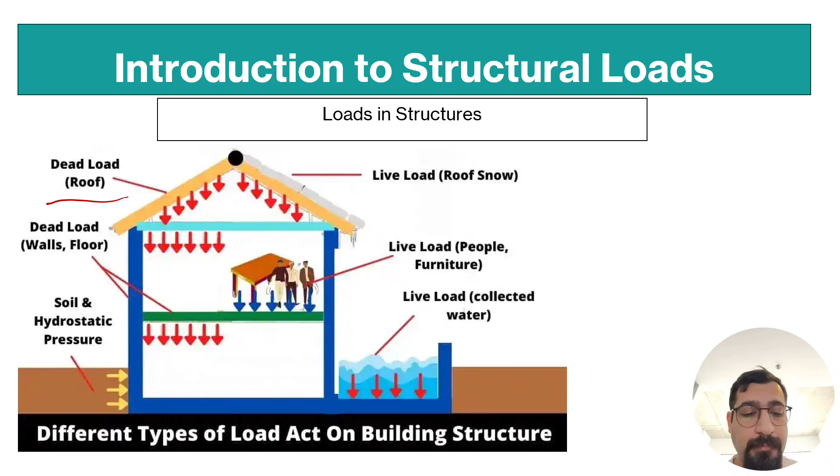Now let's jump into the topics. There are four different categories of loads on structures. We consider these types of loads as gravity loads, like dead load, live load, and snow load, which is different in different environments, and lateral loads. These three are vertical or gravity loads, and these are lateral loads, which include earthquake, wind, or even soil pressure load.

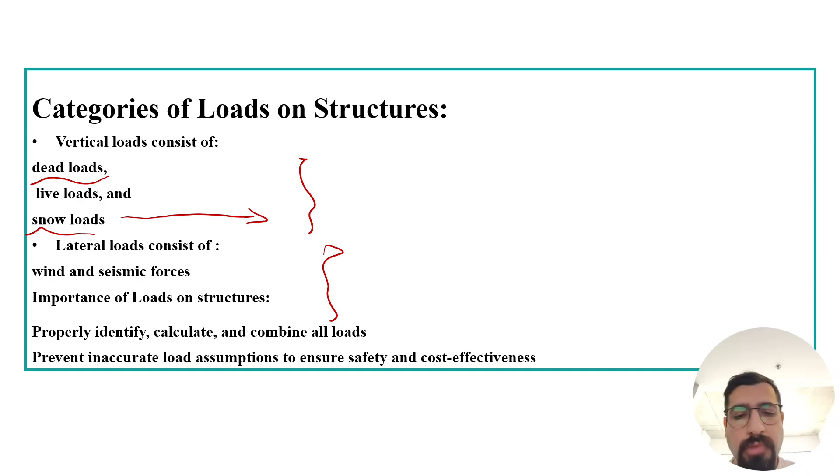Each of these load categories has different types of suggestions in the codes which we should follow, and my main idea is to get to know it based on the NBC, National Building Code of Canada. There is one other question: why do we want to calculate the loads? Basically, we design members based on the loads.

I'm not gonna go to answer these simple questions. I just prepared the slides. You can read. The slide is pretty simple. I want to talk more.

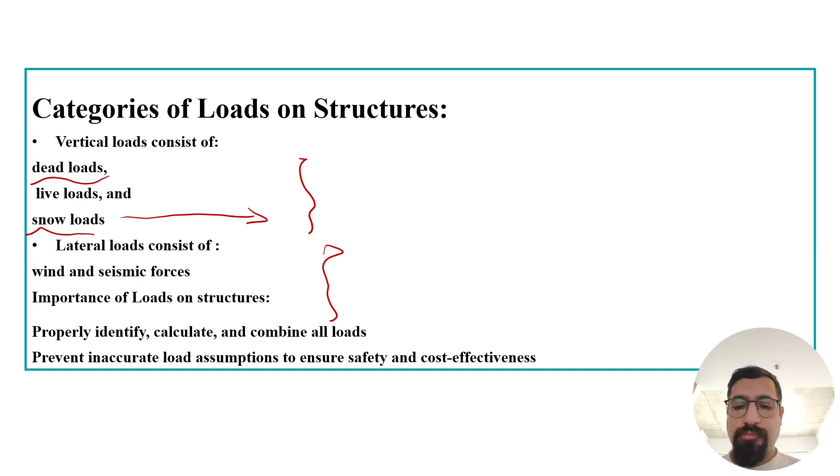So why do we calculate these loads? We want to design our members based on the most exact possible load that is acting on our members. If we underestimate the load, the structure may become unsafe, and if we overestimate the load, the structure becomes unnecessarily expensive and is not an optimized design. As engineers, we should always consider the economical part of the problem in our design.

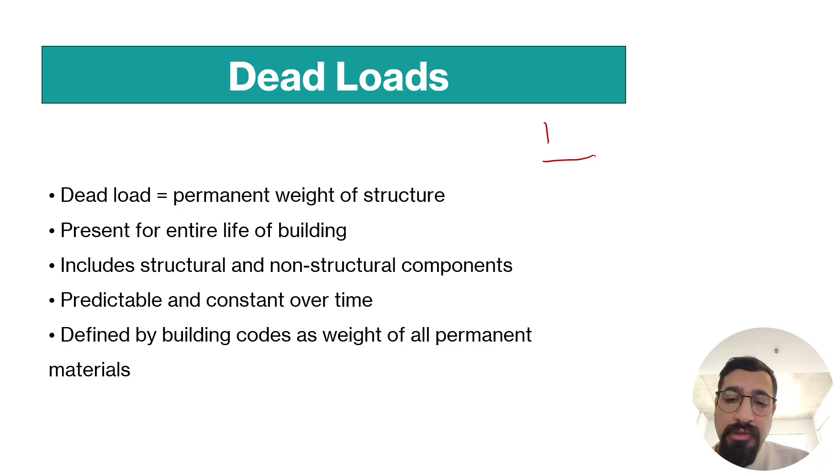Here's some explanation about dead loads. It's the permanent weight of the structure. Dead load also has two categories: dead load and super dead load. Normally we call dead load the self weight of the members or elements, and the super dead load is all the other dead loads, like furniture, tile, ceiling, or even walls, partitions, or any other type of dead load that acts on the structure.

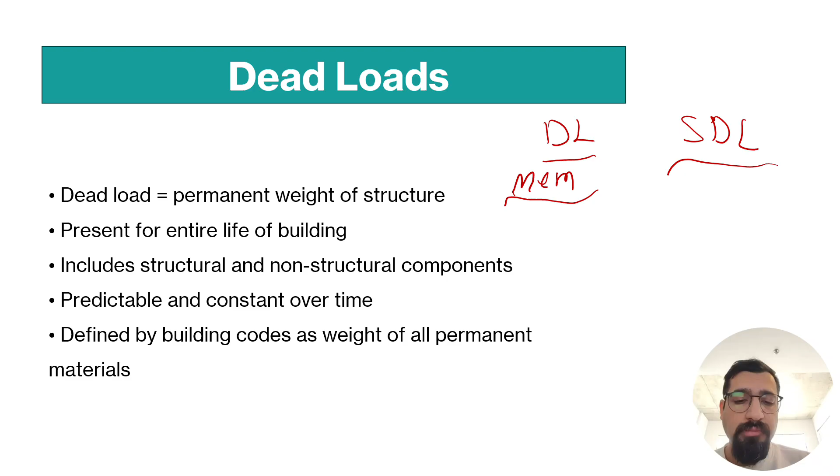The most important parameter about the dead load is that it's predictable and always constant over time. For example, when we consider the live load, we design based on a probability problem. We consider the chance of that amount of load existing based on the definition of the area. But the dead load always exists, and it is normally defined by the weight of the materials and the building code.

The amount of concrete volume for the topping is only 0.092, and the concrete weight, we know, is 24.

I think if we multiply, I need my phone, I don't know, I don't want to minimize the recording, but

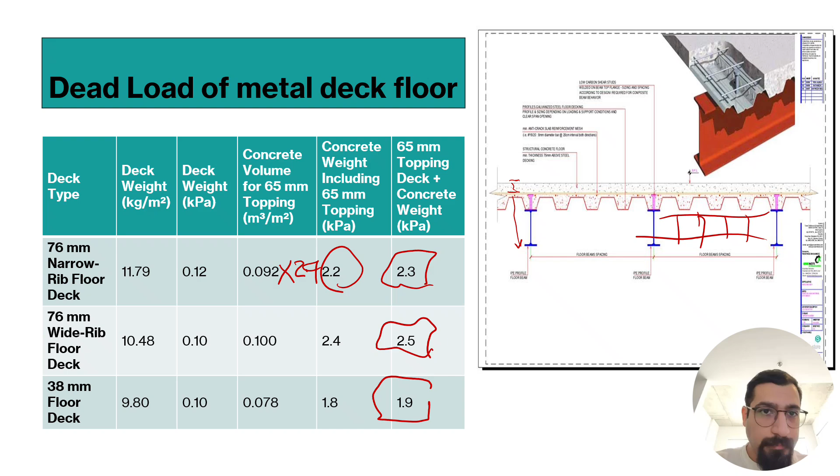I prepared this PowerPoint last week. That's why I'm not completely aware of the whole slides. I just started recording. I didn't go over it once, but I know I prepared some pictures.

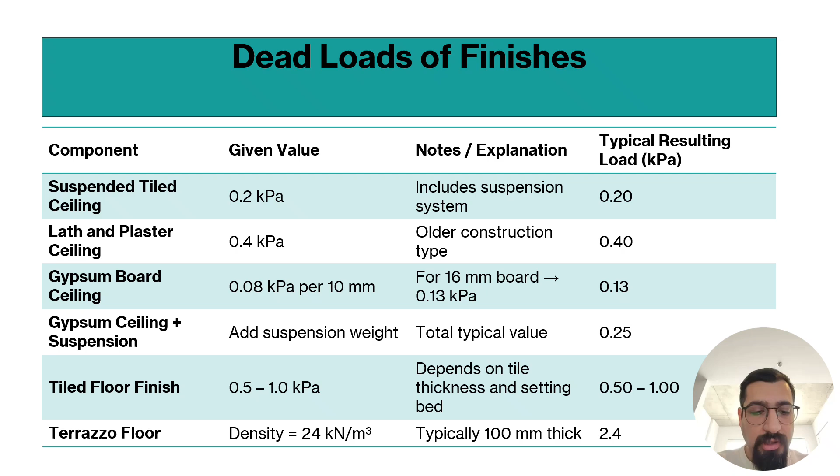Okay, I didn't know if I go to the next slide, I cannot go back to the previous one since I'm recording on PowerPoint, but I have my notes here.

that one is normally at 0.4 kPa. This is the older type of construction. You might not see this type of construction today, but if you face, for example, repair or remodeling or rehabilitation of old buildings, you might face these types of roofs, where the dead load is 0.4 kPa.

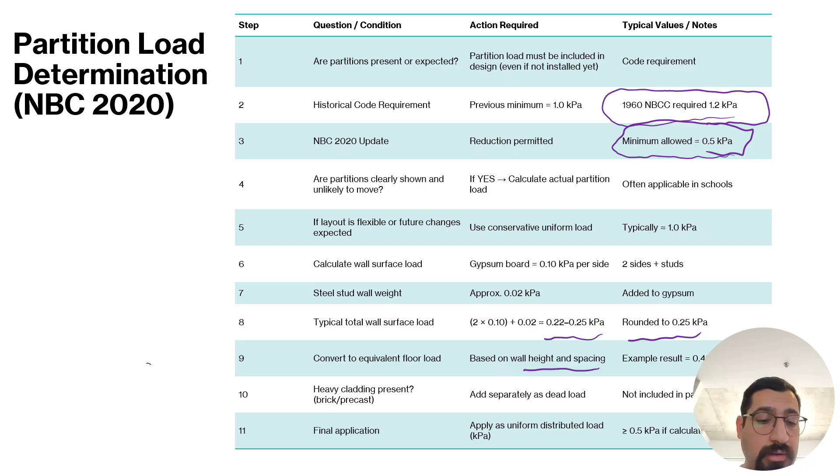Oh, it's over 26 minutes. I had something less in my mind. I think there are only 5 slides remaining.

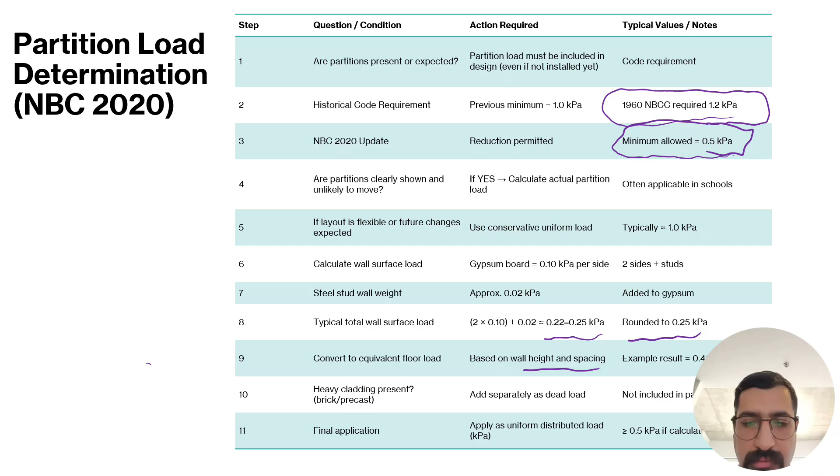In this slide, it talks about the loads on mechanical and electrical services. Distributed loads such as ducts and wiring typically take 0.2 kPa, and sometimes we consider 0.25. Basically, what I'm doing for the partition load is 1 kPa on the whole area, if the partition is not heavy or is not a precast member or concrete cladding. For the mechanical and electrical combined together, I used 0.25. This is pretty simple. Make your life easier.

You don't normally have that much time to spend on figuring out exact values of the loads when you want to design a building. We have rooftop units in Canada, which is very common. Adding or changing the rooftop units normally is on the roof. Sometimes in schools or other areas, after 20 to 50 years, they decide to change the units. The new units are normally heavier.

We have the same situation for calculating the slab of the elevator. I have at least 4 or 5 different projects where they want to change the elevator motor, or elevator engine, and the new engine is heavier and bigger, or the new rooftop units are bigger and heavier. Because of this, you need to predict this when calculating your load. It's better to have safe margins when you're designing your buildings, because these are mechanical parts.

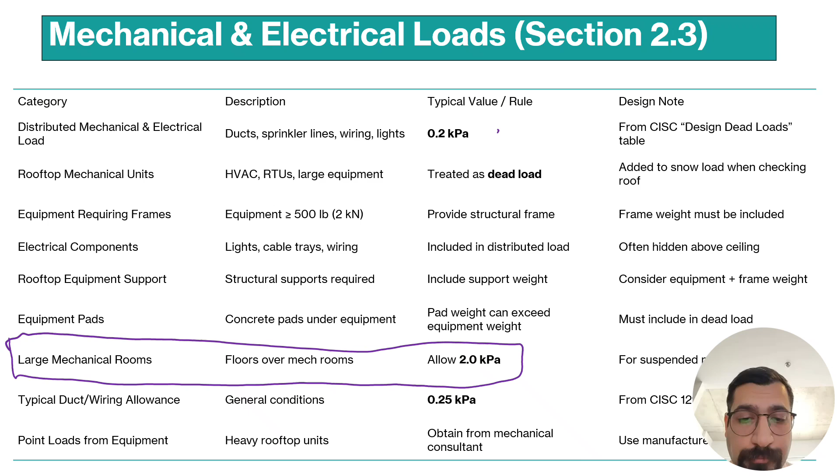You are sure they are going to be replaced before the service life of your building, so you have to consider that in the next 20 years technology might bring rooftop units that are heavier, and you might consider that in your design. For large rooftop units and mechanical rooms, 2 kPa is a good number. This table also mentions that if the weight of the equipment we are going to put on our roof is over 500 pounds, it's better to put it at the exact location on the roof and design it based on 2 kPa.

And that's it. You can read these tables. I tried to prepare a reference where I got these numbers. All these values, I can say, are 80 or 85% correct. I used different codes like wood manuals or the structural steel design manual, and I put this reference for that.

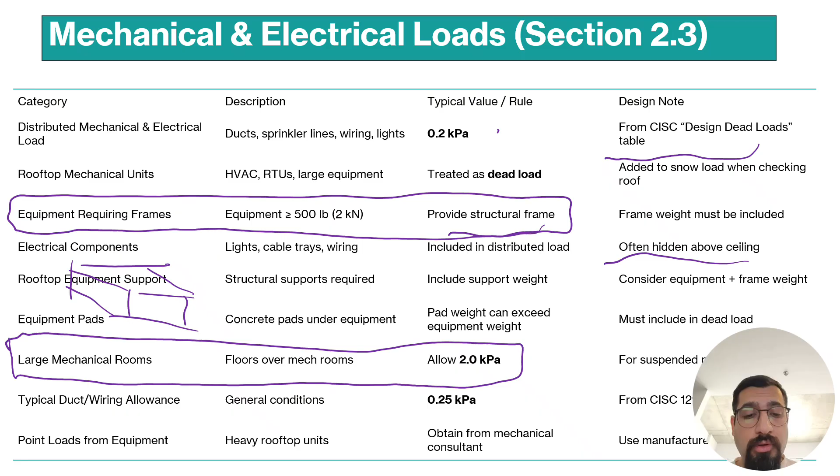What else can I talk about? Okay, one more thing that is very important. We always need to define framing when we want to consider rooftop units on a floor. When we are using big rooftop units, we need to add reinforcement to the roof. Also, we need to consider snow drift scenarios or cases, case 1, case 2, case 3, for big rooftop units, which for the snow loads I think will be in our next recording videos.

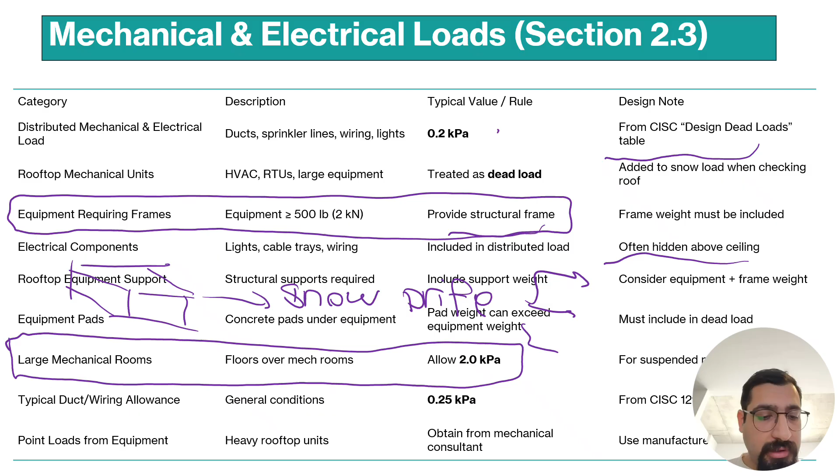Now I want to talk about dead loads for green roofs. We didn't have any green roofs in Iran. We had, maybe in some buildings in Tehran, roof gardens, but the roof garden is different from green roofs. On a green roof, the plants or structure will grow, and the weight increases during the life of the building, so you should follow the recommendation in the code. I don't want to talk about that much, but normally you have some kind of increase in the weight over the service life.

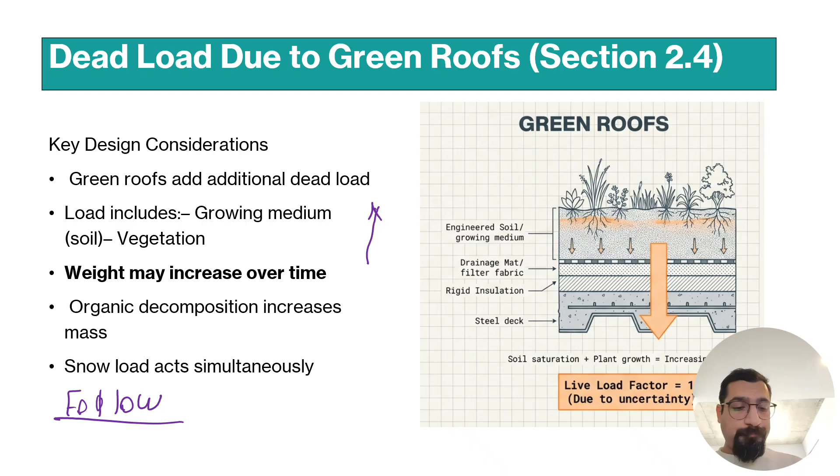Okay. I didn't expect. We can talk about. Let's finish this.

Only two slides remain. For the live loads, most of the codes and standards have some kind of recommendation. But what is this recommendation? It's based on the occupancy of the building. For example, the National Building Code of Canada defines assembly areas and non-assembly areas, and for each of these areas it recommends some type of live load to consider. What is an assembly area? An area where people gather in large numbers. For these areas, normally we consider 4.8 kPa.

You can see in the slide 4.8 kPa. For the large mechanical room, 3.6 kPa. My picture is in the right corner, I don't know. For library, 7 kPa. Let's make sure. Yeah, for the library and storage of books, 7.2 kPa as a live load, which is a very big number. For the office area, 2.4 kPa. For living rooms in buildings, 2 kPa, which is similar to what we had in Iran.

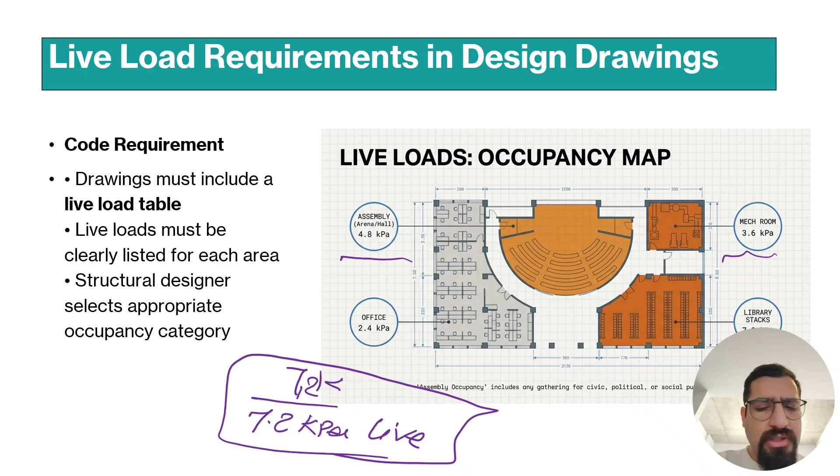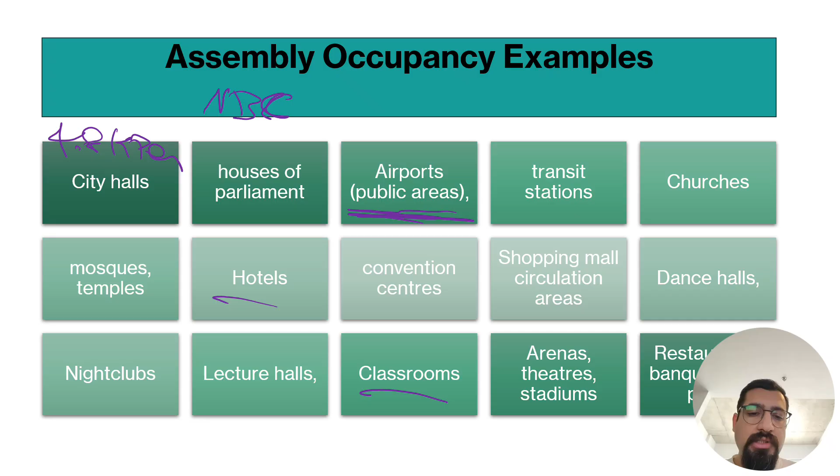These spaces, as assembly occupancy examples, can experience dense crowd loading. For this reason, they are classified as assembly occupancy and generally require a live load of 4.8 kPa. City halls, Houses of Parliament, airports, especially transit and public areas, churches, mosques, hotels, classrooms, and every area where you think people are going to gather together. These are the assembly occupancy examples, and you can find more information in NBC 2020, I think, but there is no difference. The areas in the next slide are not assembly areas, and this is the final slide.

Finally, what is a non-assembly area? Offices, manufacturing areas, retail stores, shopping malls, residential areas, parking garages, storage rooms, hospitals, prisons, library stack rooms, also kitchens and toilets. These are not considered assembly areas. So when it's not an assembly area, there is a live load table in the NBC or OBC, or even, for example, Code Number 6, Mabhas Shesh, in Iran, where we can use different types of live loads from the table. You can use this table for the main numbers we need to calculate. Thank you so much.

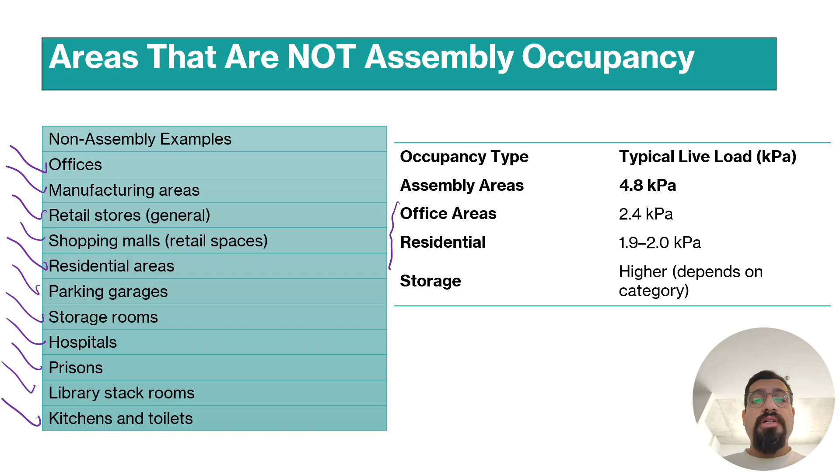In the next video, I'm going to talk a little bit about live load and jump into the snow load. Maybe talk about live load reduction calculation. Also, maybe I'll bring one or two examples about the calculation of live loads, and then start to explain the snow load, which is very important in Canada.